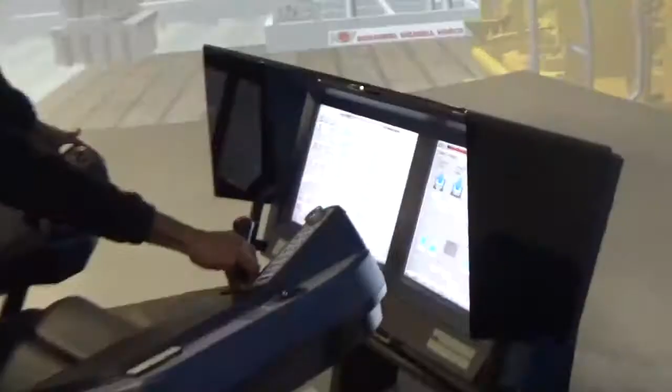Here at the University of Texas at Austin, students within the Drilling Rig Automation Group are working to develop a new generation of autonomous drilling rig technology.

One team is developing NanoRig, an entry into the DSATS drilling rig competition, a competition to design a machine capable of autonomously drilling a vertical hole in a block of concrete, which may include inclusions to complicate the drilling process. The machine itself is limited in power, size, and cost, and entries will be judged on cost, drilling speed, efficiency,

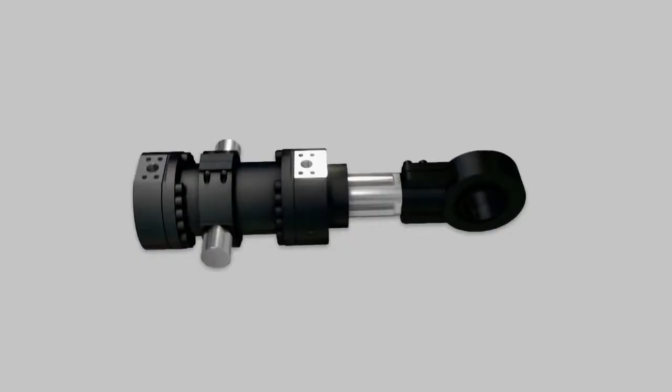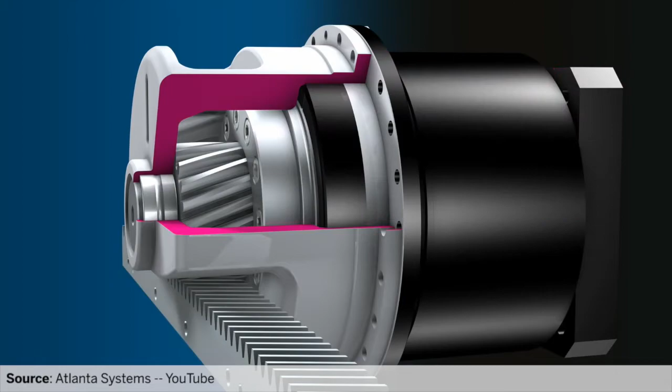and ingenuity. Most simply, a rig requires two actuation systems, one to provide axial motion to the drill string and impart weight on bit, the other to provide rotation and rotary cutting force to the bit. Axial actuation may be accomplished in a variety of methods, including a pneumatic or hydraulic system to drive a series of pistons, a drawworks-driven lift system with the possible mechanical advantage of a pulley system, or a rack and pinion or mechanical screw that can provide precise motion and force.

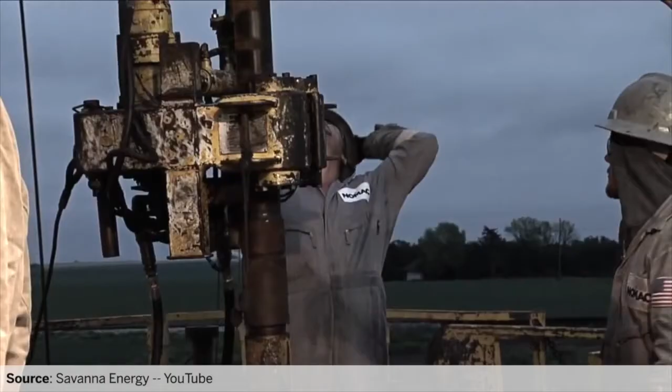Weight on bit may be active, provided by the axial actuation, or passive, provided by the weight of the traveling components. Rotational actuation may be accomplished using either a top drive system or a Kelly bushing. A Kelly allows for a stationary motor, while a top drive allows the motor to be used as a part of the passive weight on bit system.

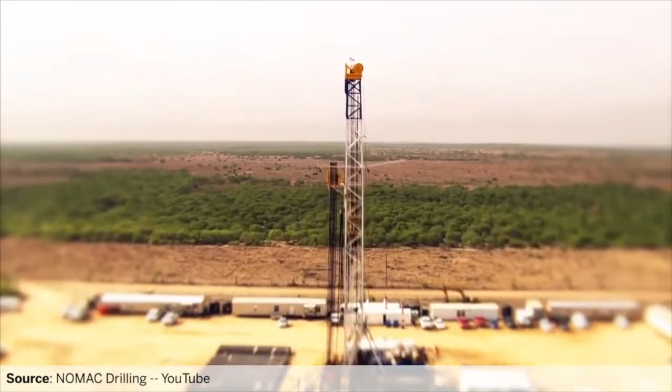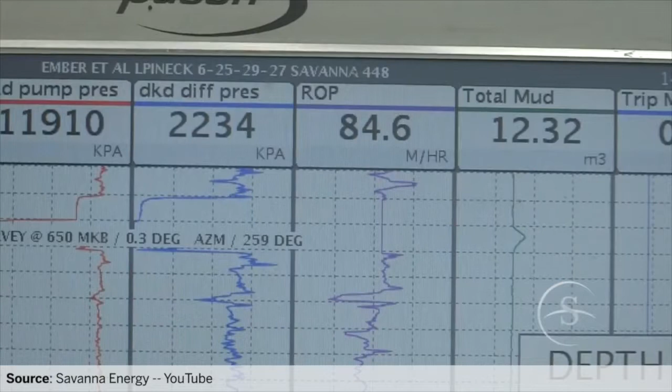Structurally, a rig may be freestanding, requiring a large and potentially heavy superstructure, or be integral with a concrete block and thereby use the weight and size of the block for stability. So what we're trying to achieve is to provide the fast ROP, but in the meantime use the smart control system to avoid any stuck pipe or vibration problem.

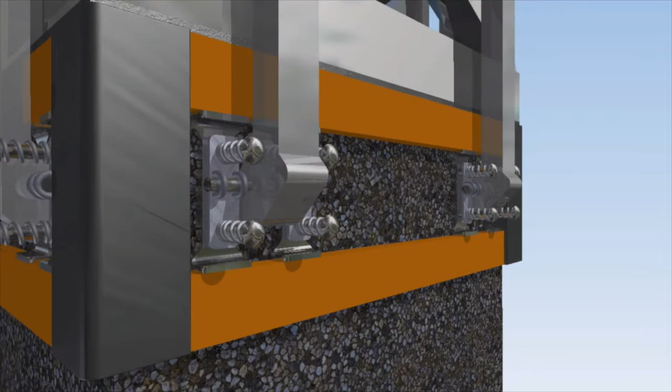Desiring to reduce weight and size and to improve mobility, the team chose a sample-mounted design that uses the mass and size of the concrete block as an integral part of the structure. A series of outriggers act to clamp the rig onto the block and provide additional stability.

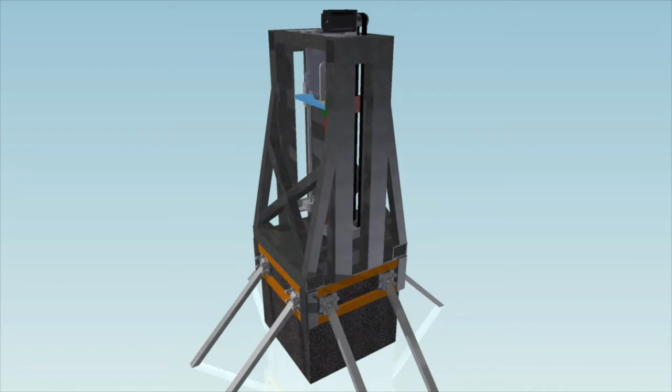A continuous drawworks system, in the form of a belt drive, provides precise axial position and force and is driven by a stepper motor. For mechanical simplicity, a top drive system with a 1.5 kilowatt AC motor is directly connected to the drill string. To reduce the power requirements of the drawworks, to provide maximum power to the top drive, a passive weight on bit system is implemented that utilizes the weight of the top drive motor and uses the

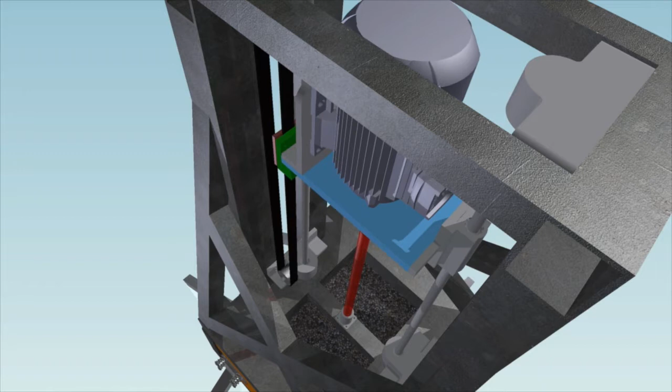drawworks as a brake. The top drive AC motor is controlled using a variable frequency drive, which eliminates the need for speed and torque sensors due to the accuracy of current integration within the VFD. The stepper motor is driven by a stepper drive with a high fidelity encoder and torque sensor, allowing for precise measurement of top drive height and weight on bit.

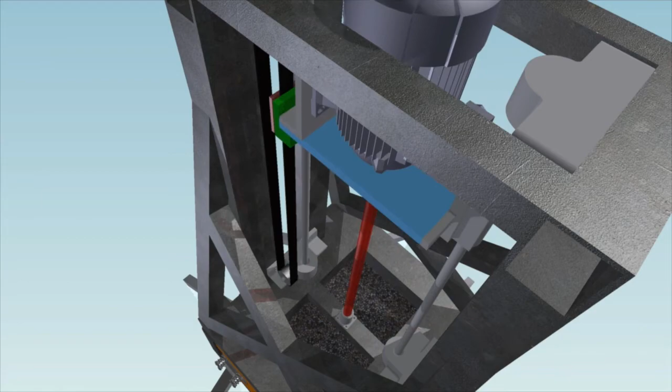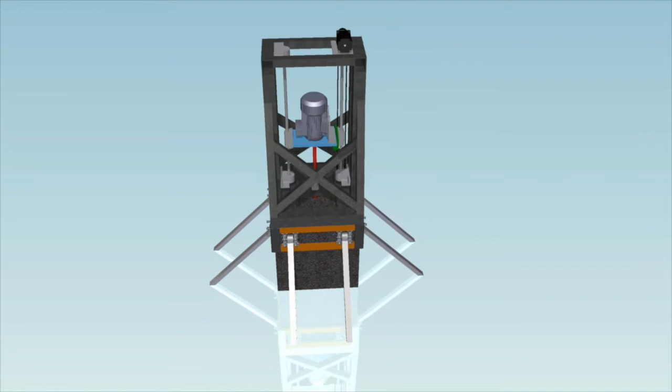A high-frequency triaxial accelerometer is placed at the end of the drive shaft and provides vibration measurements to sense drilling dysfunction. Many components in the rig design are dual-purpose. The outriggers both secure the rig to the sample and provide additional stability. The top drive motor acts as a rotary actuator while providing weight on bit. The VFD both controls the top drive as well as provides the necessary sensory output, and the concrete block acts both as a sample and as a stabilizing structure.

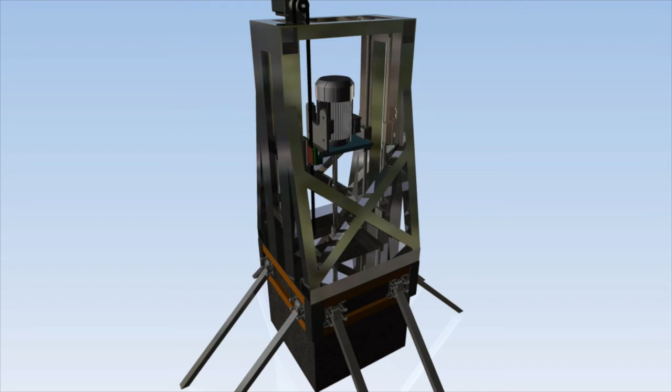Our goal is to predict what kind of different regimes we're going to get in the cement block and try to plan accordingly. So once we detect we hit a different regime, we change our controller or our mode accordingly and manage the situation. That's our primary goal in the controls.

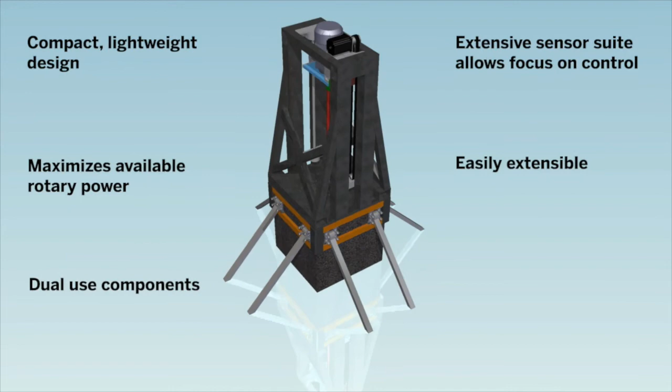NanoRig is a compact, lightweight entry into the DSATS competition that maximizes the available rotary power, features many dual-use components, and allows much of the focus to be on effective control strategies. It is also easily extensible due to its small size and accessible tower.